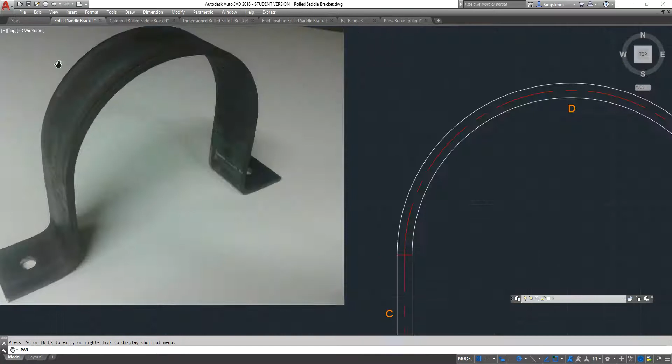Okay, so what I've got here, this drawing, calculating a rolled and folded saddle bracket. So you can see in the picture here, I've got this bracket here that's been made out of 6mm by 50mm wide steel. The one I'm doing in the drawing, this one here, is actually made out of 8mm stock by 75mm wide. So

what we want to do is take our main drawing, and the best thing you can always do when you try to make these brackets is draw them out and actually break them down into their constituent components. So, you know, we've got a straight here at A, the bend for B, straight for C, a bend all the way around here for D, straight for E, F for the bend, and G for the straight as well. So I've got that here. It's exactly the same bracket.

You can see that A and G are exactly the same length. C and E are exactly the same length. The bends on the corners, B and F, are exactly the same length. And this large rolled surface here is in a separate colour. So the bend, I've broken it into its constituent parts: straight, bend, bend, and straight. So if you can draw it out on a piece of paper, it's going to help you immensely when you start putting your dimensions down as to what you're actually trying to achieve.

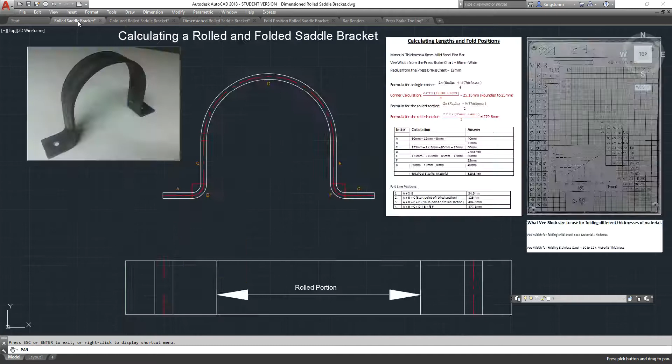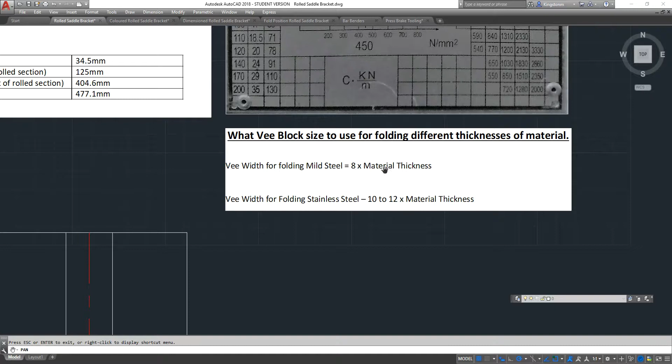Now, just for some reinforcement, what V-block size to use for folding different thicknesses of material. So the V width for folding mild steel is 8 times the material thickness. So 8 times 8 is 64mm. So I'd come down this chart here. This is off the press brake that I have at work. So that V right at the very top there needs to be 64mm wide.

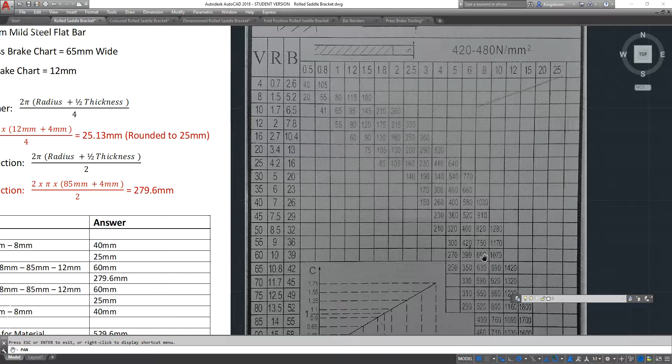And if we come down the V for V chart down to here, 65, they're recommending a radius of 10.8. As I said, I'm using 12mm. If you come across on the chart just out to here, you've got these 5 figures. The very middle one is actually for 8mm. So that's how that corresponds. So they're recommending 10.8. But what I've done is I've made up my own tooling.

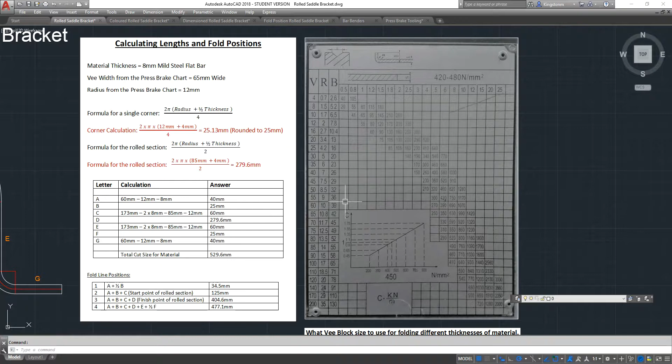So I've got this piece of steel here, 24mm in diameter. So half of 24 means the radius is actually going to be 12mm, which is going to give us the radius for the corner. So that's instead of using a dogleg blade and a 64mm V. I might add too that this V here currently is sitting at 50mm. I've just put this mock up here so you can actually see it. So 12mm for the radius for the throat instead of the 10.8 on their chart. I just wanted to put that in there once again to show you how to do it.

So I've got the chart of this table written up, or this method for calculating the lengths and the fold position. So the material thickness is 8mm mild steel. The V width, if you were using the chart, would be 65mm. The radius from the press brake chart, oh, sorry, okay, so I've made a mistake on there, haha. That should say 10.8, but I'm doing it at 12, and that's why it's got 12 in there.

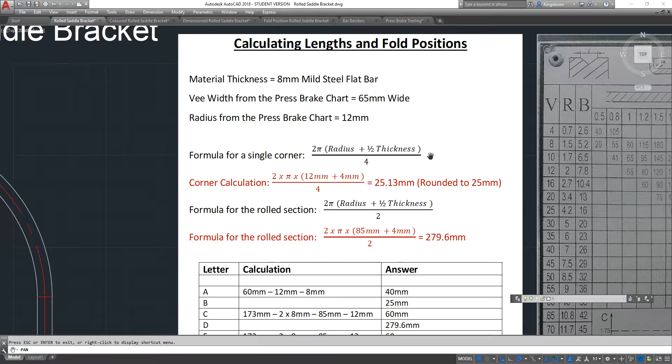So the formula for a single corner is 2 times pi times (bracket radius plus half the thickness), close bracket, all divided by 4. So the top of the line, 2 times pi times radius plus half thickness, is for a full 360-degree circle. By dividing it by 4, we do a portion for a 90-degree corner. So this is a 90-degree corner of a full 360-degree circle. So we would divide it by 4.

So there's my calculation, corner calculation. 2 times pi times 12 millimeters plus half the material thickness. The material thickness was 8, so 4 millimeters. Do that calculation, divide it by 4, and we get 25.13 millimeters. I've rounded it to 25 millimeters. Obvious reason, you're not going to be able to use a scriber and a square to 0.13 of a millimeter. So I've got to be sensible about it.

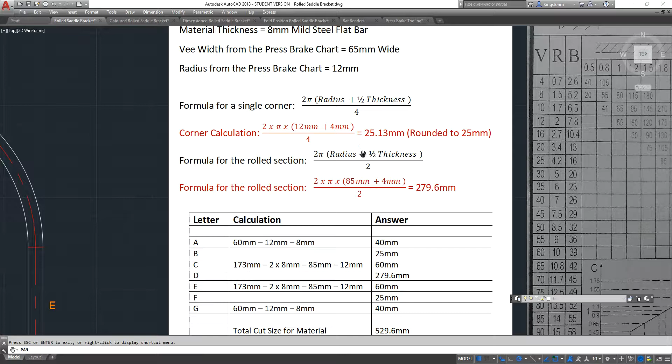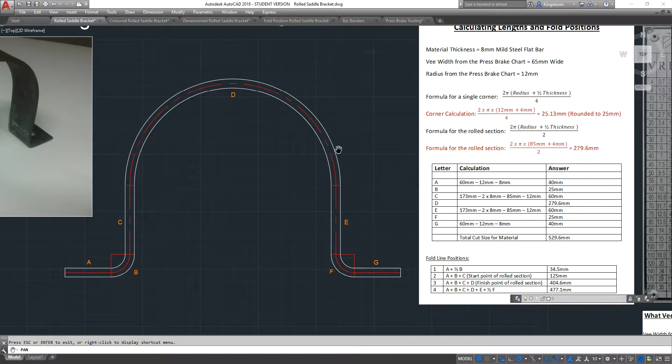Formula for the rolled section. If you look at the formula, the top line is exactly the same. I have merely divided it by 2 here because if we look at it as a full circle, we're using half of it. So where we had 4 in this formula for a 90-degree corner, dividing a full 360-degree circle gives me 180 degrees, and that's what that is. It's half of a circle. So that's why it's divided by 2.

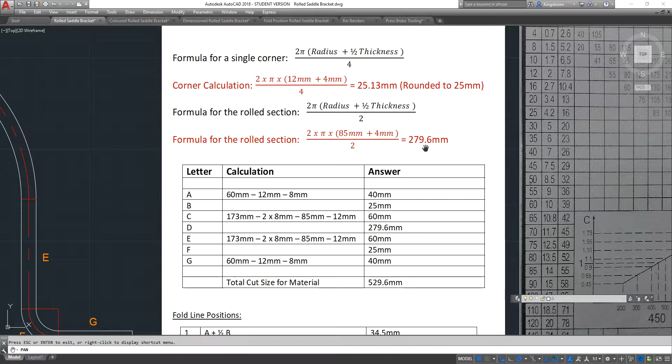So the formula for the rolled section is 2 times pi times the radius, which is 85 millimeters, plus half the material thickness, which was 4, close bracket, divided by 2, and we get 279.6. I've left it at 0.6. It's close to 0.5. We'd try and work to half a millimeter, so that's perfectly acceptable. So that distance, from the end of C all the way around to E, is 279.6 millimeters. So I'll put that into the chart.

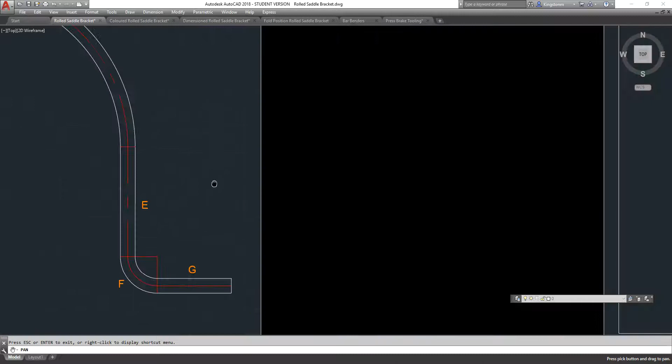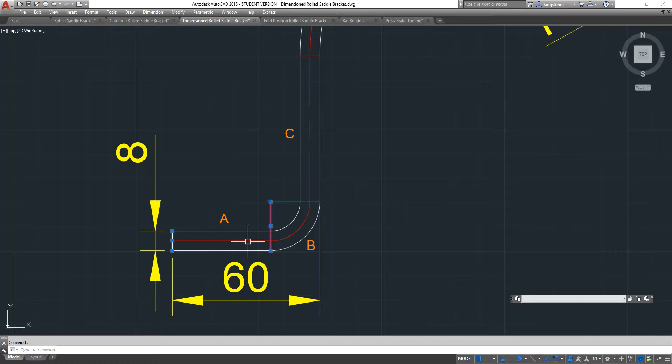Got my letters down the side here, A, B, C, D, E, F, G. So A and G are exactly the same. The distance between those 2 lines is 60 millimeters. We have to take off the material thickness here, 8 millimeters, and then we take off the radius. So 60 millimeters minus 8 millimeters minus 12 for the radius means that A, the straight line distance before we start the bend, leaves us with 40 millimeters. In the chart you can see I have got 40 millimeters for A and 40 millimeters for G.

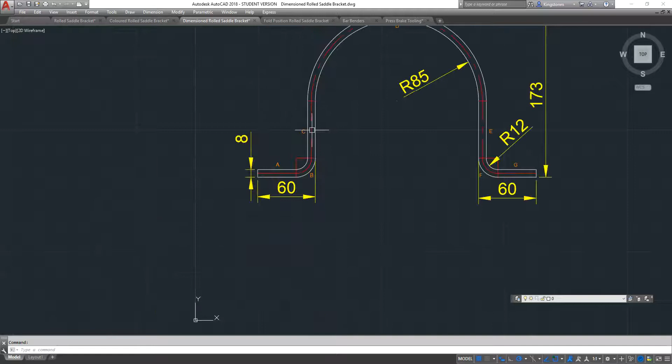So the next one will be C. Have I got that in there? Yes, I have. C and E. So here's C on this side and E on this side, both exactly the same length. In order to determine those lengths, we've got 173 from the very top of the arch all the way to the bottom. So what do we need to take off? We take off the 8 millimeters material thickness, and then our radius, because that comes all the way down to this red line here. So we've got 8 mil, we've got 85 millimeters. At the bottom, we've got the material thickness and the radius. So 8 plus 12 plus 85 plus 8.

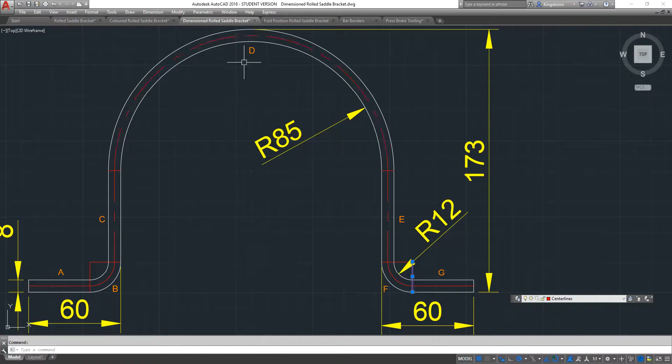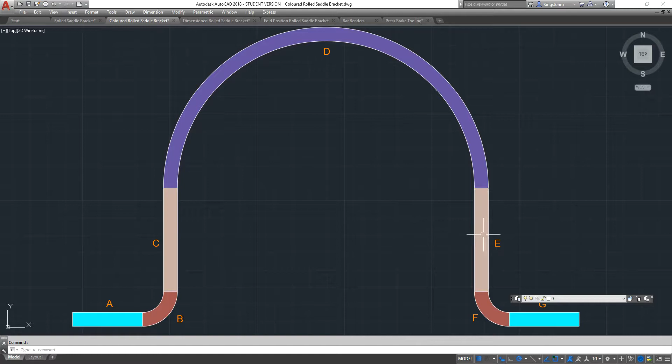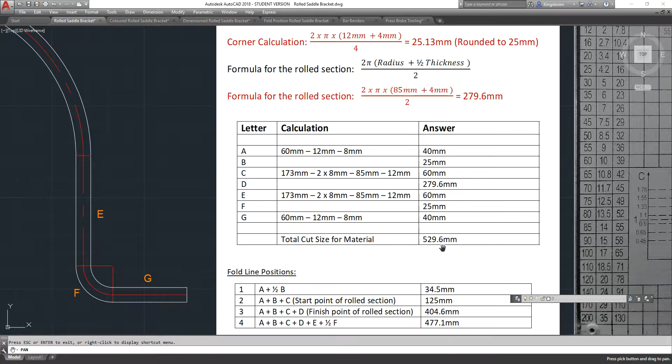So we'll go back into the front chart. I've got 173 minus 2 times 8, which is 2 times the material thickness, minus 85 millimeters, minus 12 millimeters for the radius, leaves 60 millimeters. So C and E are 60 millimeters long. Okay, so D, I have automatically put in the calculation, 279.6. So add them all together, 40, 25, 60, 279.6, 60, 25, 40, gives us a total length of 529.6 millimeters. That is the length we're going to cut our piece of steel at, 75 millimeters wide by 8 millimeters thick at 529.6 millimeters long.

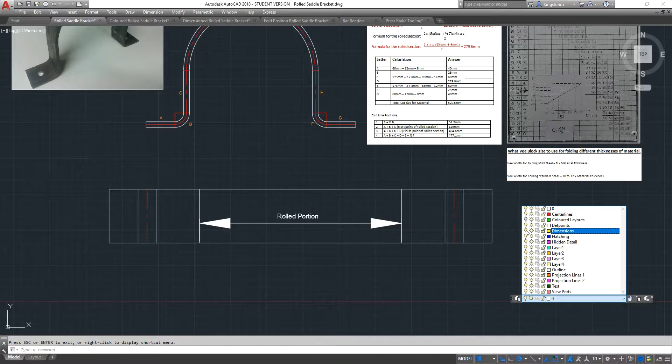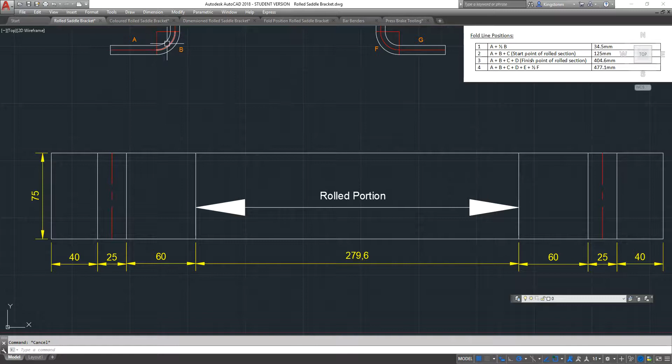And we can start marking off these lengths, A, B, C, D, E, F, G. So down here, I've got my piece of steel. Turn on some dimensions. There you can see it. I've laid it out. First one from here to here is 40 millimeters. That's the flat, which is A. From A to there is B. That's that portion around there, and it's working to that mean line, that red line. It's not working to the throat or to the heel. It's working to the mean line. So that is 25 millimeters.

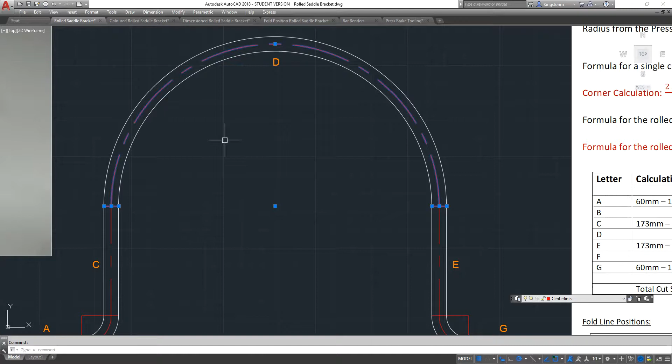The next distance, C, was 60 millimeters. Then going from this red line here to this red line here, right around that arch on that mean line, is 279.6, and then we're laying in our lines back out the other way, 60, 25 and 40. So it's a uniform length, and there's our piece of steel laid out the exact size. Let's put that on.

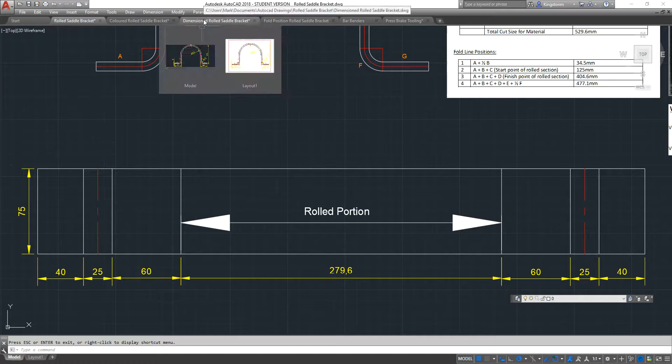A in this portion, B here, C, D, E, F, and G. So, fold line positions. Well, if we go into, which one have I got it in? This one here. You can see the fold line positions. This line here is actually at 45 degrees. So our first fold line from the end here is A, which was 40 millimeters. This line here was 25 millimeters long, and half of 25 is 12 and a half.

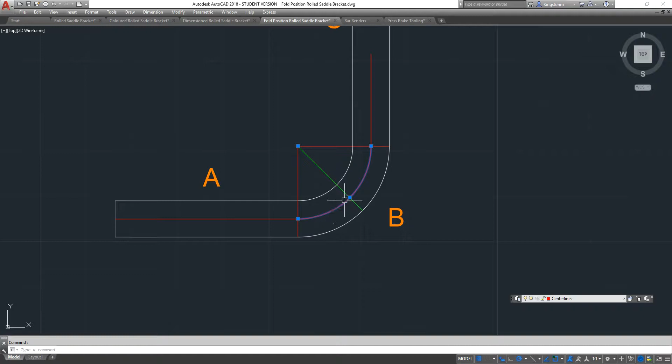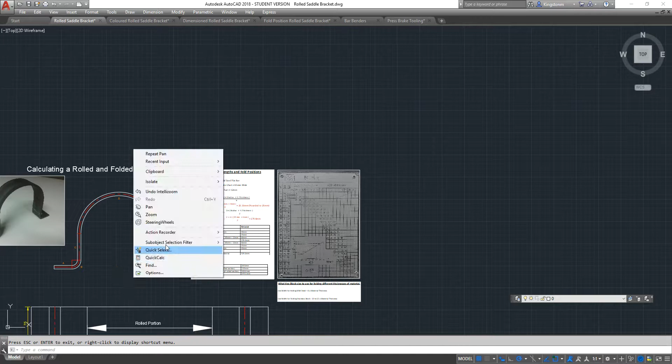So into our drawing, front page, if we look at what I've got here in the chart, fold line number 1 is A plus half of B. Oh, have I marked that wrong? I have too. Look at that. Have I gone and put that on the chart? So there's always some mistakes on these things, simply because, yeah, okay, so it's only wrong on the chart.

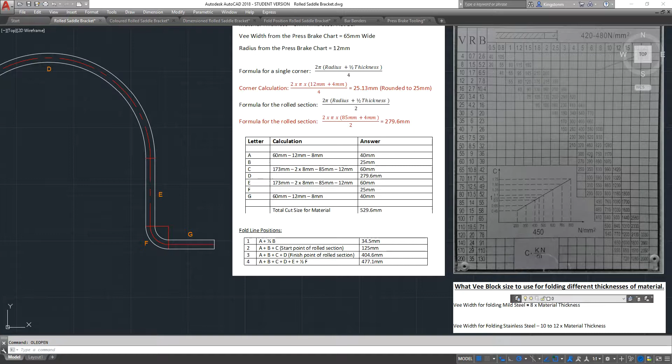Do I want to fix that on the fly? I'm going to fix that on the fly on another screen. Just give me a moment. It's just bringing it up, and I need to change that to, what did I say, 52.5. 52.5. Save that, update that chart. There we go. Number 1. Sorry about that. You just got to do this on the fly because there's a lot of work involved. A plus half of B is 52.5.

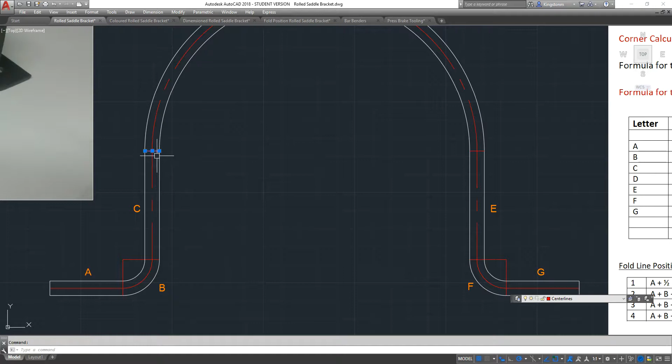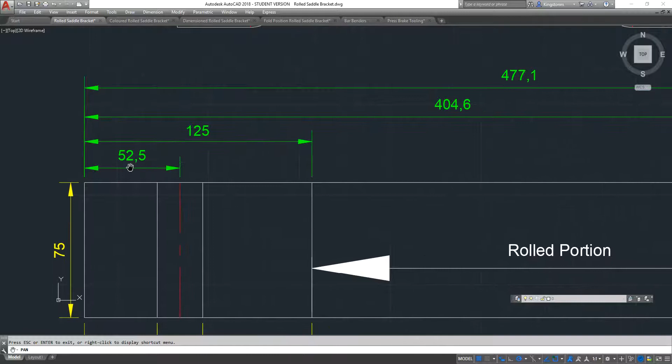The next point for 2, which is the start point. So I've said that this red line here is the start of the curve, which it is, and it's going to go around to this point here. So I've given those 2 positions. I might actually turn those on right at this point here. Turn this on here. Where are we? There. So there's the first one. As you can see, I got my 52.5 right on the drawing. So that was the first fold.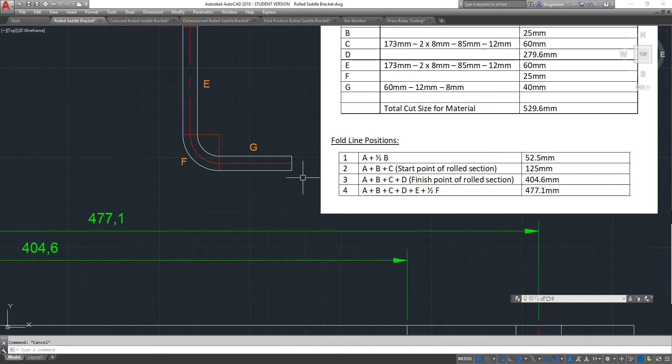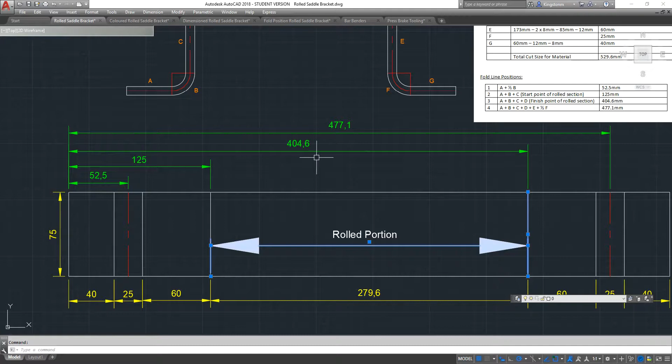So position number 2, that red line there, is clearly all of A, all of B, and all of C. So you can see I've done that on the chart here. I've got A plus B plus C, which gives us 125 millimeters. So from the very end here to the start of the curve, and I've written this rolled portion, this is where it starts and this is where it goes to here. So that dimension between those 2 points there is that 279.6. So it comes in from the end, 404.6, just on the chart there.

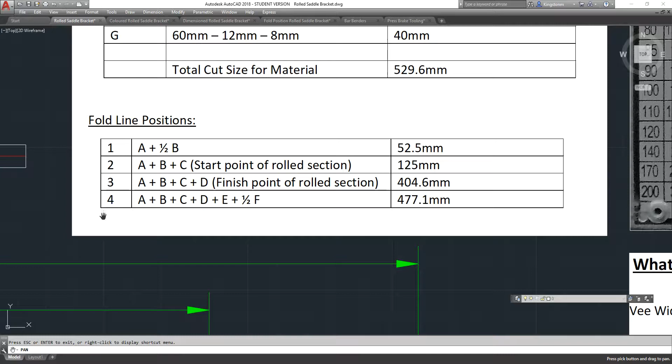Sorry, point number 3, where the curve ends up here. Number 3 is all of A, all of B, all of C, all of D, 404.6. Point number 4, which is, where have I got it? This one here. Point number 4 is F, or half of F. So we would have all of A, B, C, D, E, and half of F for the last fold line on the last side.

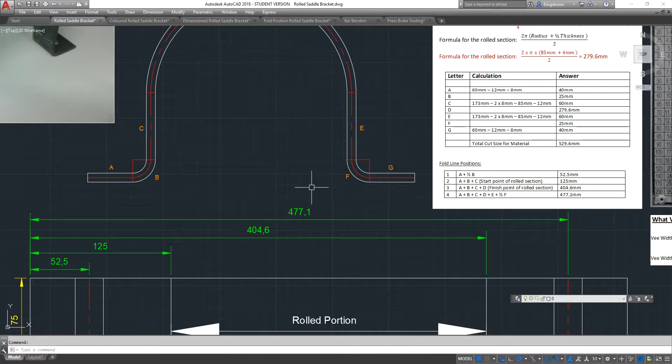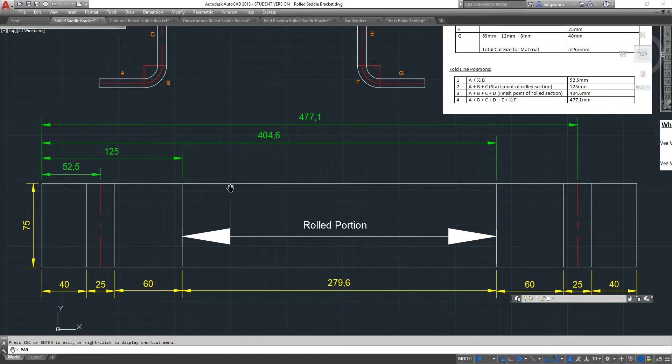So if we go back into our chart, you can see that I've written that A plus B plus C plus D plus E plus half of F gives us 477.1 millimeters. I left that 0.1 in simply to show that I was trying to be accurate. You would simply mark it to 477. So there's our folded out bar, or our flat blank.

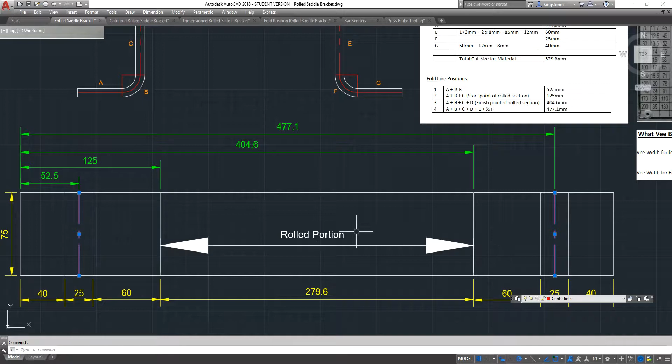Now clearly, if you look at it, the large curve is rolled from the inside and the two folds are actually on the outside. So if we look at the drawing, we could say that the two red lines are on the other side of the piece of steel, and on this side you would roll between these two pieces here. 85 millimeters is quite a tight radius on a piece of 8mm steel. You'd have to have some reasonably strong rollers to roll that. They're very difficult to roll as well.

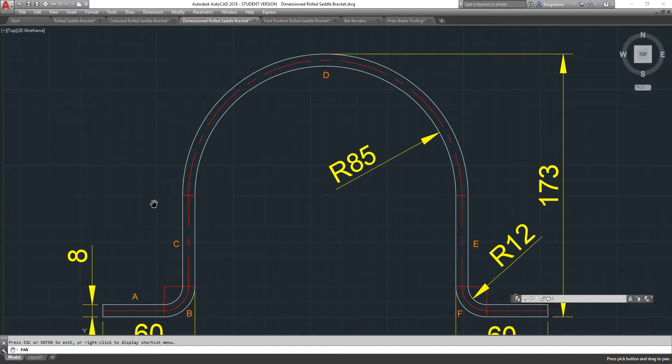I've rolled quite a few brackets like this, and you have to do a bit of work with a hammer to get them. Your rollers can sometimes roll past your start and your finish points, and you have to do a bit of hammer work roughly where the joints are to get this uniform curve here. Quite difficult at times, and you might be able to do your folds after, or maybe they have to be done first depending on what sort of equipment you've got. But that is how you calculate.

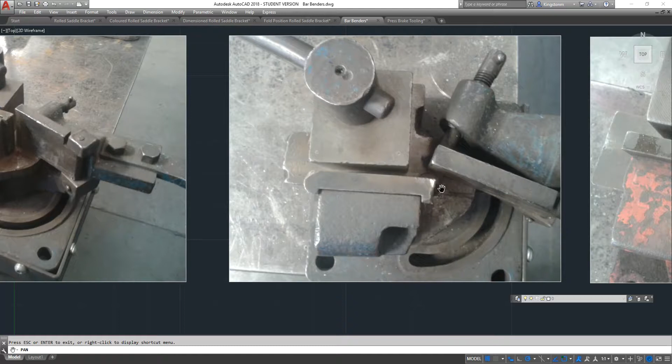Having done the calculation for a press brake, if you were going to do it on a bar bender, this is the holding block, this point with the arm on it. You'd put your steel down through here and clamp it in place with this clamp, nice and tight, and it's going to radius around this corner. If you're going to do a 90-degree turn, it's going to come around this corner. It's got a sharp corner on this end.

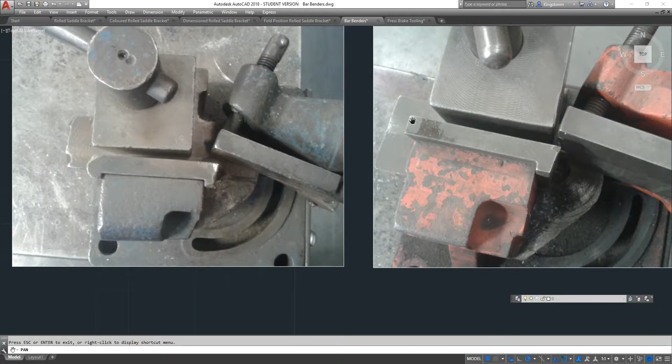This one actually has a radius on this end. This other one sitting beside it has got a sharp corner and a sharp corner on the other end. In actual fact, the round corner here is for folding rod. Rod, if you fold it on a sharp corner, either of these two corners here or this corner, actually notches the corner and mangles it over time. So the radius is actually for doing rod.

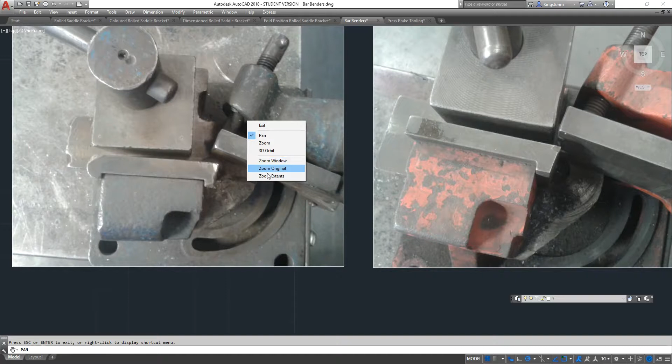So if you were doing flat bar, you're going to have to put a piece of flat bar into one of these and do a fold. And it depends on how tight you put that clamp on it. If you don't do it up to the same tension all the time, you're going to get a different radius. So they're not going to be as accurate as they would be if they were done on a press brake, where you've got a lot of control over the width of the V and the radius bar that you're using. So I've just put these in for comparison.

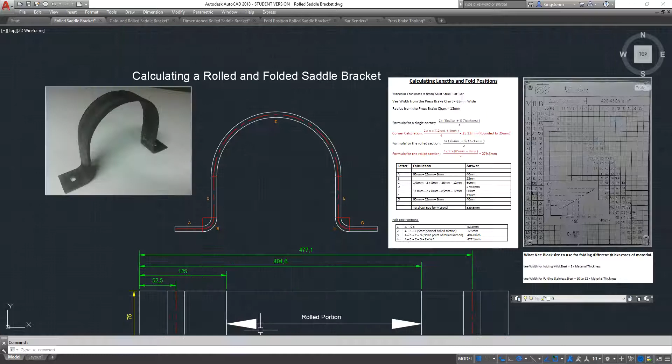Now the other thing I want to talk about is if I put a piece of bar in here and I've marked across it with my fold positions that I've got on this drawing. Let me just zoom into this, sorry. These two red lines, if I'm going to fold those, you're going to scratch them on with a scriber and a square. When you come to the press brake, if you've got a large radius bar like I've made, it's actually going to cover your mark up. You're not going to be able to see it.

The best thing to do is actually mark an offset from the center of your forming bar to the actual edge of the V block. Now on this chart here, I have got this box here, says the center of the V to the front edge of the V block. I said to you that this is a mock-up and I've used a 50mm V. From the center of the V to the edge of the press brake is 55.5mm.

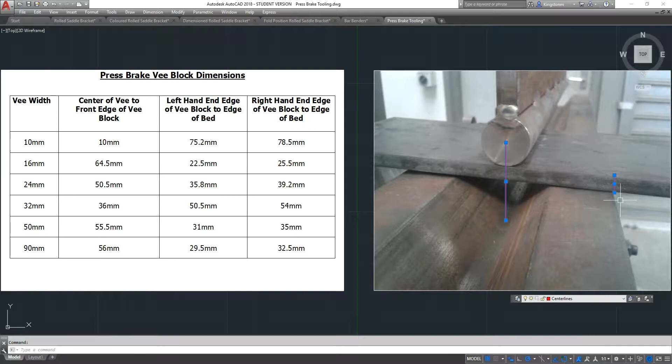So once you've marked your line across your plate, you can measure across to the front of the press brake, 55mm, and put another line, and every time you step up to do your fold, you actually line your 55.5mm offset up with the front of the press, and that way you can get an accurate fold every single time. You're simply not going to see it in here. If you use a dogleg blade, you can get a greater degree of accuracy. Of course you can. But it's just a method for trying to line it up, and you know it's going to be hitting on the fold every single time accurately.

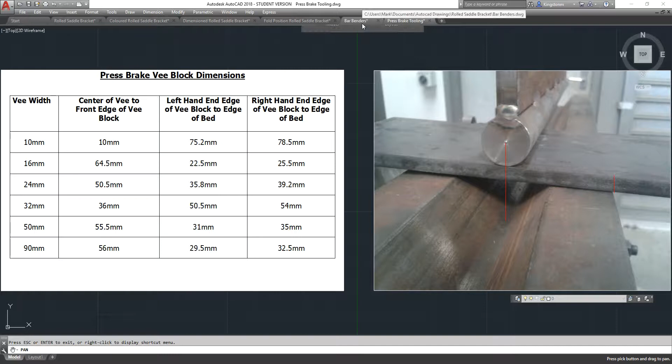So where am I heading? I'm going back to the beginning. Pretty much covered everything, I think. Calculations there. You need to think about the information that you would be putting into the equations. But as you can see, once again, I've talked about this before, it's only addition and subtraction, multiplication and division. These equations aren't excessively hard.

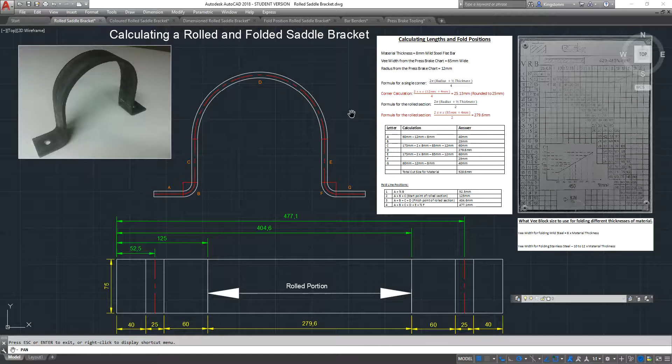They need practice. You need to sit down and make these sorts of things 10, 12 times to really gain some confidence and retain the knowledge. If you just do them one every now and then, it makes it very difficult to actually learn and retain the knowledge. So like everything in life, they require a wee bit of practice, but they're actually very, very straightforward, and there's not much to them.

So there you go. There's a drawing on calculating a rolled and folded saddle bracket. Everything on the page there. Come back to it, refer to it a few times, and have a go and see how you go with it. Thank you.